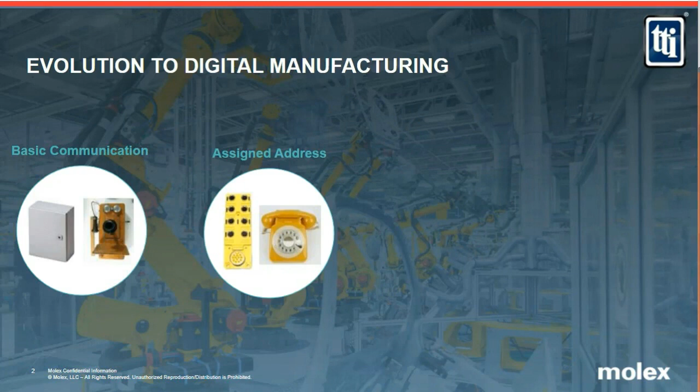We start to see the real transition to digital manufacturing and that evolution as we start to think about how the cellular telephone started to change our lives.

The cellular telephone started to change our lives when it became the standard outside of being mounted in a car, and it was available on the hip of your pocket, and you were carrying it around. But what that was, was just networking that mobile device, that ability to communicate to different individuals anywhere without having any wired connection to it, having that device sitting on a network.

So we can think about the parallels of a network and that transition that happened on the plant floor, like a distribution block, a smart block that supported industrial protocol. Those first industrial protocols were DeviceNet or Profibus or the like, in which we started to consolidate not only the wiring closer to the devices at hand, but we started to consolidate the communication of those messages coming from those devices back to the main cabinet via networks.

But again, what we have to take into consideration is that your cellular telephone at that time was nothing more than a telephone. It had a very single use. Within the implementation that exists today, the majority of I/O blocks are very much single use, which means they are a piece of hardware developed specifically for a task at hand.

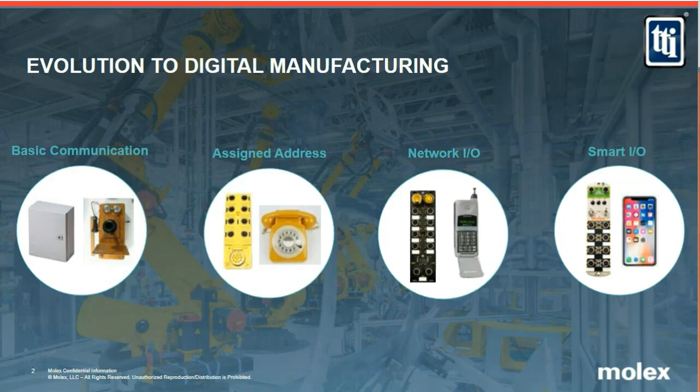All right, moving to today's architectures and really understanding what they are and understanding how they're limited in terms of where we sit within the transitions that we're seeing on the marketplace.

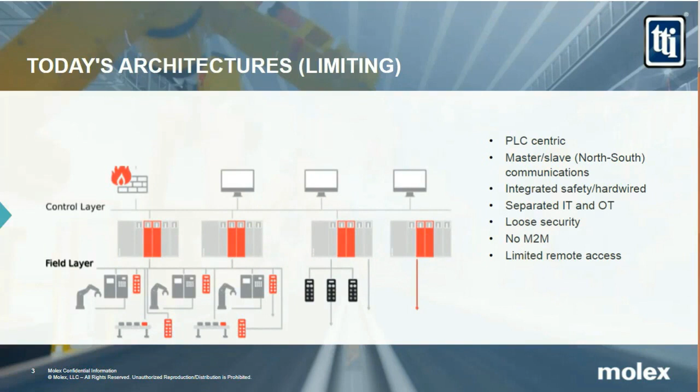Architectures that exist today are very consistent with the way they've been deployed since we went from relay logic to PLC-based centric systems. So that being said, the majority of architectures today on the plant floor, within a conveyor application or within any industrial plant-based application, is very PLC-centric. They're very master-slave, north-south communication, which means that communication as it relates from the transition from the enterprise layer through to the control layer where the PLCs sit, and the field layer, is very much directional.

You can gather information or push information from the field layer up through the control layer into the enterprise layer, or enterprise can request information via the control layer, the PLC level, or the device level, but it's very push-pull. It's not open communication as it relates to real time, or real communication related to any decision that's other than one that's been put into the system.

So it's limiting. All of the safety versus non-safe communication at the control layer is segregated. There are two separate networks. There's a safety PLC and a non-safe PLC, and a large majority of those are separate networks that exist on the plant floor. There's very loose security.

And what I mean by security is that there's an inability to securely access complex devices like robots, for example, or complex CNC machines or complex vision systems, to pull data or to do firmware updates or bug fixes on the product via a web-based connection. And that's because of this very loose security and the fear of allowing access to a field level device, and allowing that access to perhaps then migrate and make its way back into the enterprise layer where companies can be hacked.

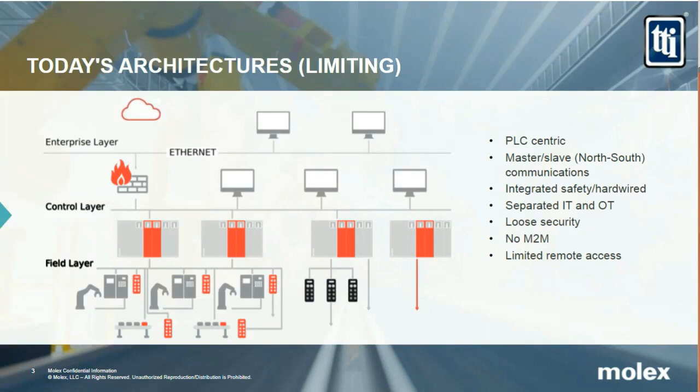And what does that mean moving forward? How do these limitations that exist, that have come about because of the way the transitions have occurred in the market, how do those have to change? I like to point to the analogy of the flip phone versus the smartphone, and flexibility is a big piece of it. A big chunk of that is also emerging business models.

Everything is a service, which means that the way in which complex machines will service their products at the field level moving forward might not be to implant an engineer within a facility based on that facility specifying a number of their complex machines, for example.

It may mean that there is a defined, safe connection in place, where then the support and the maintenance and all of the interaction between the manufacturer and supporter of that complex machine is done remotely. And that then, from a business model standpoint, changes everything about the way that company manages their equipment.

And therefore, that can build cost out of the application because they're not inserting an individual directly on site. And so that builds cost efficiencies, efficiencies as it relates to travel, as it relates to all those different pieces. So that's just an example of some of the things that we see changing moving forward.

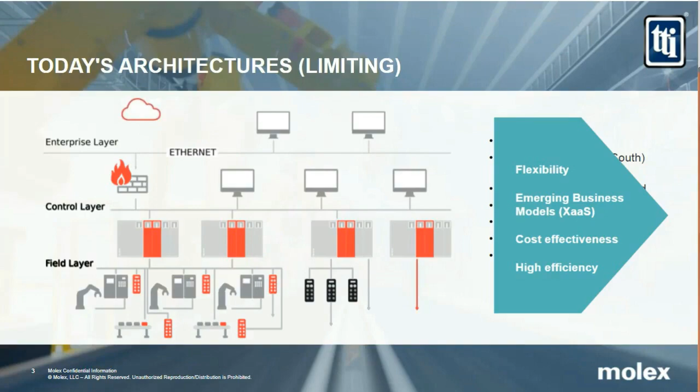So when we think about these limitations that exist today that we all know about, this drive to Industry 4.0 is very specific around an understanding of some of these limitations, and the fact that a number of these emerging technologies will allow us to build these efficiencies in. So what do tomorrow's possibilities bring within IIoT and Industry 4.0?

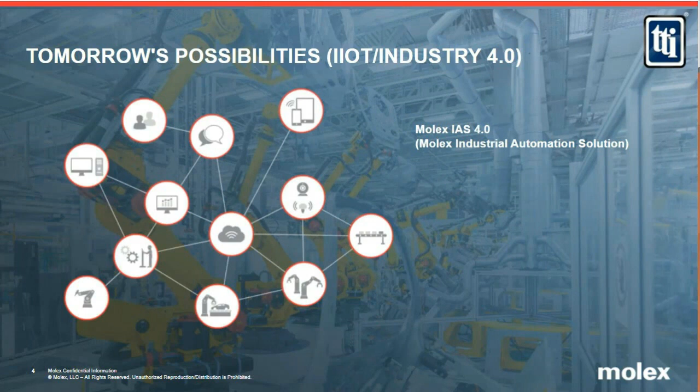These are defined within the program that we're working on, which is Molex Industrial Automation Solution 4.0. It really creates something that's much more open, where you have a much more distributed control strategy, where you no longer have just communication that's master-slave.

So, for example, flip phone to flip phone, or flip phone to home phone. You also have the ability to manage multiple connections between multiple devices at the same time. Each one of these devices has the ability to take on other responsibilities. So there's embedded support for safety and integrated security.

There's no real differentiation between IT and OT. It's one technology. IT is information technology, which is the IT we know in our day-to-day lives. OT is operational technology, and that's the management of the devices at the field layer, the sensors and the complex scanners and devices, and the ability to have all those devices, as we move forward, have more intelligence and be able to intercommunicate and make decisions that are best for the manufacturing process or best for the organization's long-term goals and strategies.

Each device having embedded security, so you know that when you speak to a device, or you make a connection to a device, or you make a connection to an area of ownership that you have, you know it's secure. And from a security standpoint, I like pointing to online banking.

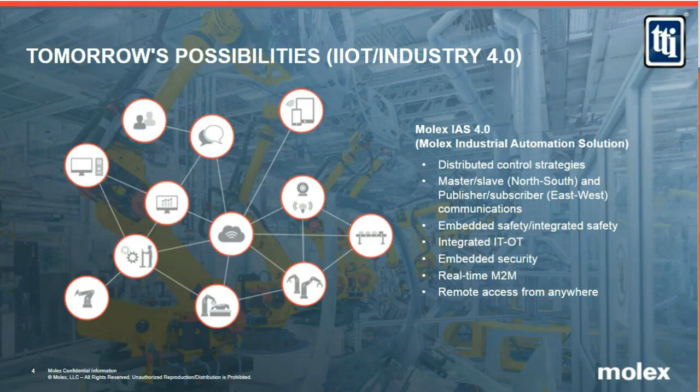Within our core IP, intellectual property, we support a large array of fieldbus communication protocols for safe and non-safe, for scanner and adapter, that are all TÜV certified. We are one of the leaders in the market and have been for a very long time as it relates to standard industrial protocols for EtherNet/IP, for Profibus, Profinet.

We've developed backplane modules that sit on the backplane of the majority of communication and PLC manufacturing collaborations across the globe in all flavors. That includes EtherNet/IP, Profinet, Profibus, CC-Link IE, DeviceNet, Remote I/O, EtherCAT, and for master-slave, scanner and adapter, safe and non-safe.

We design and manufacture our own industrial protocol stacks and hardware solutions. That's very important because as we move towards this next transition in the marketplace of digital manufacturing, the ownership of that IP and the ability to implement those pieces of technology, not only on the hardware platforms or on the solutions that we provide, but also as we work with collaborative companies that require pieces of it that can then sit on that more distributed control architecture that we just walked through, that have the ability to pop onto that architecture and then intercommunicate with multiple devices manufactured by multiple manufacturers supporting the same communication methods.

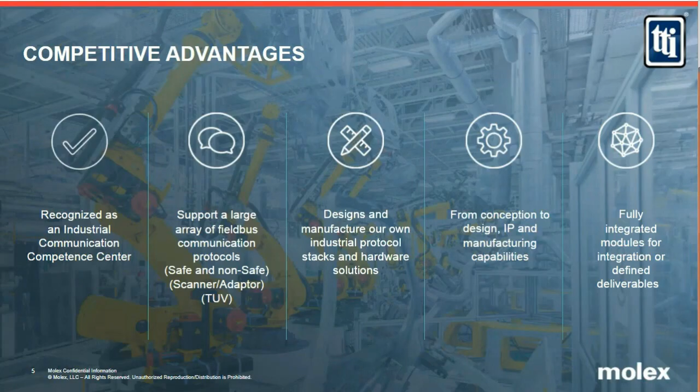So where really has been the role of us in factory automation? Going to my last point, we've always been enabling devices with protocol capabilities, as well as mechanical connections for power and device. So of all the different technologies that I mentioned, including some of the up-and-comers like IO-Link, we support the technology not only at a technology level, but we also support it at a product level, and then with our collaborators, we provide it within solutions that are offered even from a sensor perspective.

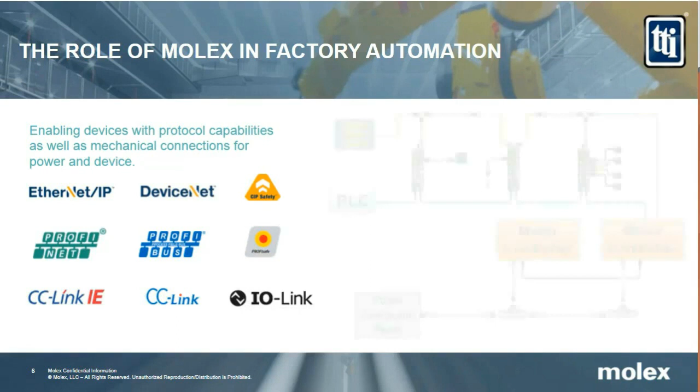So it's really about, on the plant floor, having the role of making connection from a communication standpoint. And that connection rolls from where the asset, the device, is connected, from the PLC to the distributed I/O, and from the I/O via that media to the sensor, and then also the support of the actual protocol and communication that is required in order to make that communication possible from a packet level. So the communication packet itself.

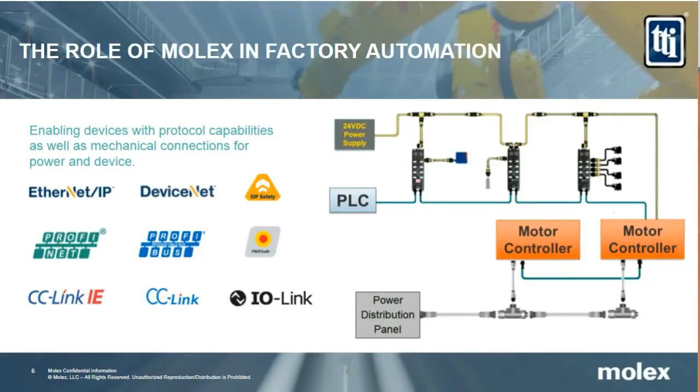The evolution of digital manufacturing. So moving forward, we understand that to some degree there's going to be no difference between a safe and a non-safe device at some point in the marketplace. So moving forward, hardware must be developed and support TÜV certification. Connectivity has to be there from both a physical media standpoint, what I mean is the cable, and from a communication standpoint that supports the rules and all of the standards that exist within the protocol, regardless of what that is, whether it's, for example, EtherNet/IP or Profinet, or CIP Safety or PROFIsafe.

Each device, moving forward, we feel, will start to have logic embedded in it. So we'll have some decision-making capabilities. We think that in the short term, that logic will be limited to some degree, and there'll start to be islands of automation where you can distribute some logic and then tie, basically, just a connection to perhaps in the short term a supervisory PLC, but then offload perhaps some safety logic within your systems infrastructure and within your architecture.

IIoT is a big piece. So when we talk about IIoT, we really talk about the connection of the product via the cloud or via an on-prem server, and having the ability to have all devices connected securely, like that smartphone that we talk about as an analogy.

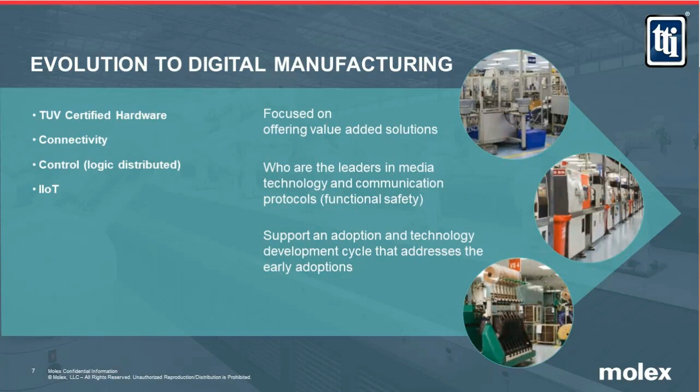Supporting within the program, supporting pre-certified or custom developed apps. What does that mean? Again, I'm going to point to the smartphone and the way in which you use it. We all know, and we've all used the application store where we've gone and downloaded a very specific application that allows us to have perhaps a much more completely defined performance-oriented GPS, or turn our phone into a level because we're hanging some pictures in the living room.

Think of it in those terms where all of the hardware, like your smartphone, has the capability of managing all these different pieces that you have access to via the app. So imagine you have a hardware platform that is functional safety rated. It's secure hardware platforms that can be delivered in different form factors. So you can think of it as an I/O block where it's distributed from an IP67 standpoint, or you can think of it, for example, as a PCBA that supports PCIe as an electrical interface and is put into a PC-based controller for a complex machine.

But what that hardware needs to be able to support is all of those connectivities. That hardware must support major industrial network technologies for standard and safety communications, as well as machine-to-machine and wireless communication moving forward. That hardware needs to support development and execution of standard or safety control applications and be able to act as the brain of the machine. It has to be able to support IoT. It has to be able to support some cloud connection for connectivity.

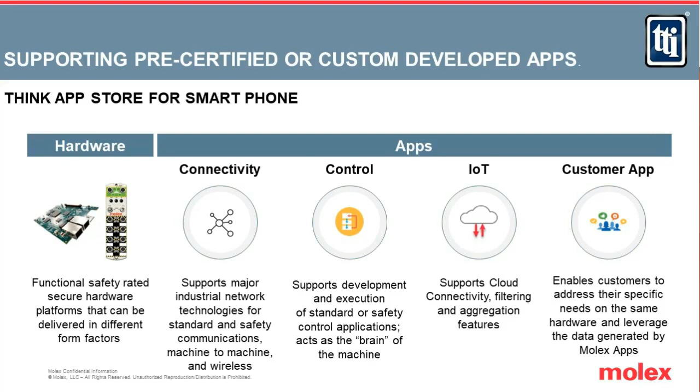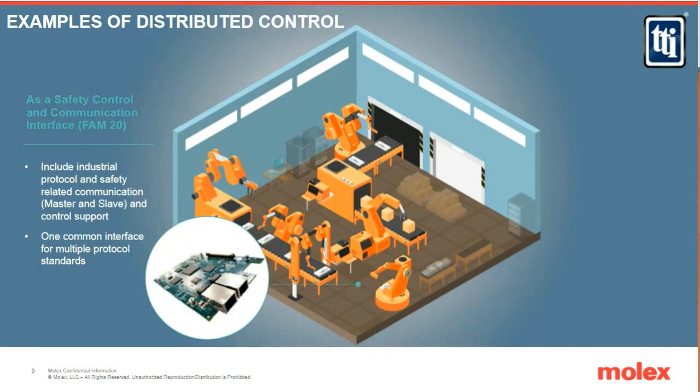Applications of distributed control are very simple. In an application where you might have a small cell that might look like this, you may include a device like a network interface card. But that network interface card sits in a PC-based control platform for a complex machine like a robot or a CNC machine. There's multiple different examples. Any PC-based control, any complex machine that has its own control platform.

You can then include industrial protocols, so allow it to be a master and slave on whatever protocol you need based on where you're selling the product from a logistical standpoint, because some languages are different in different areas of the world. You may include the ability to support some control. So you want to do some I/O support and maybe have some logic running on there. So really having one common interface for multiple protocols and standards can be implemented through a small exchange of requirement specifications.

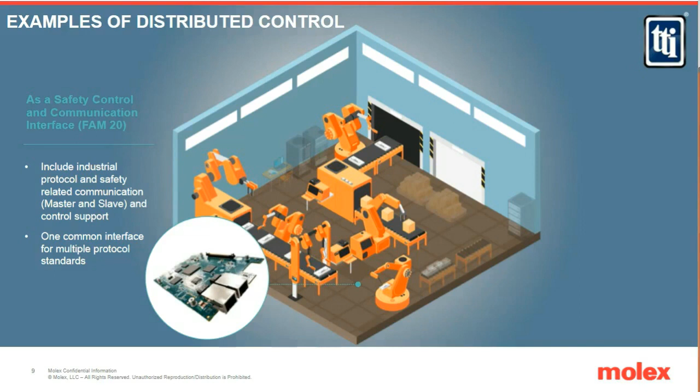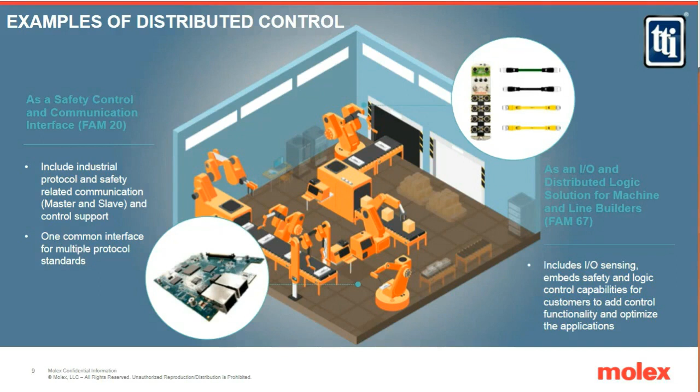Or an application more like a conveyor application or a line builder application, you can actually package it in the form of an I/O block that supports I/O and distributed logic, includes I/O sensing, embedded safety, and logic and control capabilities for customers to add control functionality and optimize the application. So it really is a transition that, we feel, is going to happen over a period of time, and those timelines are being defined as we talk today.

And because the devices are only applied based on the way they're configured, you're only paying for or using the pieces of technology that are specific to your areas of ownership or your areas of need from an application or architecture standpoint. All of those common aspects that we walked through are associated: the ability to make a cloud connection, the integrated security, and the ability to allow, as I mentioned when I lost my telephone, onboarding of the device or the maintenance of a digital twin of that particular device being maintained on a cloud someplace.

So if someday the product fails or you need to just monitor the system offline, that can all be handled securely, remotely. So it's really about transitioning control to the point where it's less rigid and a lot more open. That's really the key that we're seeing in general from a trend standpoint within Industry 4.0, and that we're trying to deploy in the development of our IAS 4.0 program.

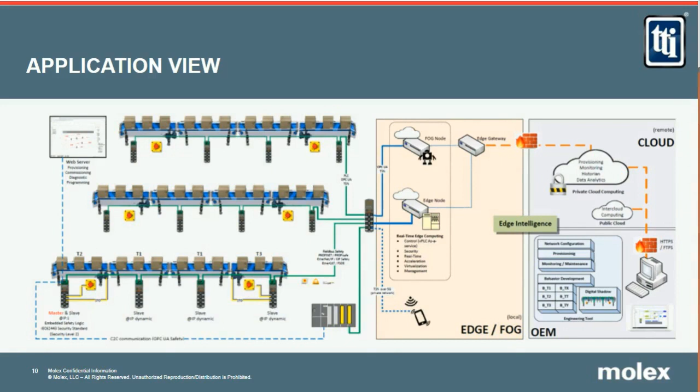Digital manufacturing will depend on multiple industrial networking technologies, delivering real-time information, intelligent sensors, and being on the edge of operations to enterprise and beyond. So that we encapsulated through this entire piece, but that means working with partners from an asset standpoint, from a sensor standpoint, that enable themselves with some of the key technologies, for example, being able to support safety, having a secure connection built in, and being able to sit on a very open network, to support multiple protocols just by clicking off the protocol you want to use versus having to buy a separate hardware platform.

These are all part of those transitions that we're seeing in digital manufacturing, and these are all part of the interactions that we're having through consortiums, through different working groups, and to some degree even working with competitive suppliers of solutions, in order to create a world where everything can talk to everything else, and that's going to take some real consolidation of agreement on technology and deployment of those technologies and specifications around those technologies.

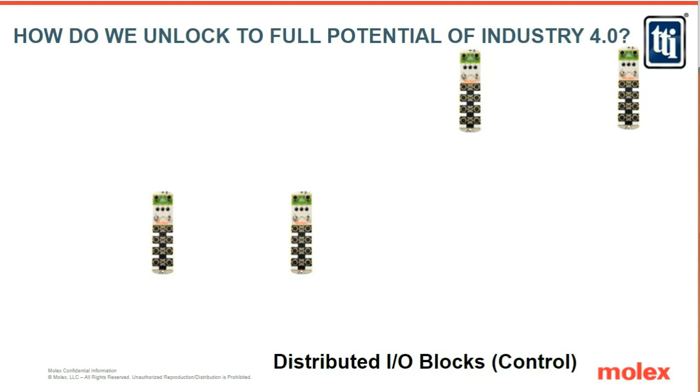the consolidation of communication. So today we speak multiple languages. We have to support multiple languages from a protocol standpoint, depending on where products are being deployed and where a specific technology might have its roots. Moving forward, like the business world, if you attend a meeting in Germany or in Japan, and there's people representing multiple countries, it's becoming more and more common today that those meetings are held in English, because we have to have a standard foundation in order to understand each other.

And we see it the same way: yes, there will be support for multiple protocols for some time to come, but the transition really has to move to some point to support different areas. So OPC UA is very important. MQTT is very important. And TSN, time-sensitive networks, are very important.

So, from a knowledge share standpoint, or from trying to provoke discussion, we really see the need to be to some degree protocol agnostic or to be language agnostic from a control standpoint. And we need to get to the point where, regardless of what sensor you buy or what piece of automation equipment you buy, the ability for those devices to intercommunicate is either defined, or there's an ability for the manufacturer or provider of that product to enable that capability. And that's when the market really opens up, and that's where we start to see those efficiencies from a cost and a deployment standpoint really start to take effect.

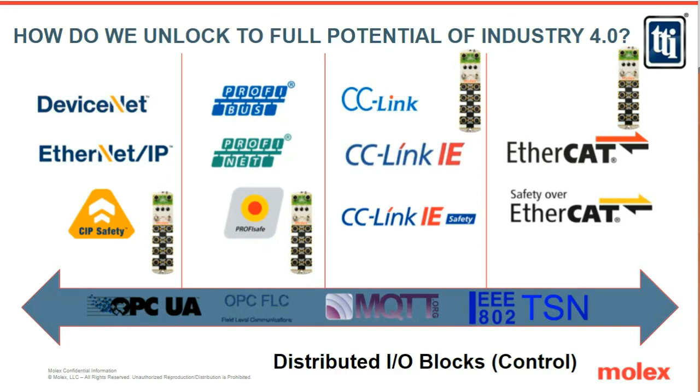The role of connectivity. So the role of connectivity, where we sit today and the role that we play, working with our collaboration partner, TTI: what are the areas in which Molex and TTI can help you today moving forward? From a connectivity standpoint, plug-and-play technology, IP67 or higher design within our I/O blocks. These are all governed by international and local electrical and safety standards, and the support for all common industrial wiring requirements: I/O signal, control, communication, and motor power.

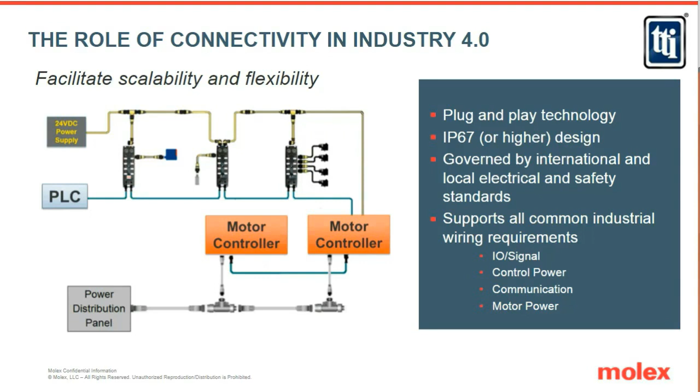Control power. Brad power, the ability to make quick connection via our 7/8 Mini-Change, heavy-duty multi-pin connectors, M12 and M23, are all products and solutions that are inventoried and available, in many different form factors and many different lengths or custom lengths that you can use within your control power applications.

Signal. A complete line of M12, heavy-duty connectors, M8, and DIN connectors, regardless if you're talking about your hydraulic and pneumatic valves or your proximity sensors or photoelectrics. The ability to make connection physically to those devices at the device level, those solutions are a big part of our portfolio, as well as network communication.

The ability to make connection to devices regardless of what network they support, whether that be Profibus or EtherNet/IP or DeviceNet or serial for that matter. A complete line of M12 D-coded and Cat5e solutions, heavy-duty connectors, M12 X-coded, as well as RJ45 for connection in-cabinet or connection to that enterprise layer.

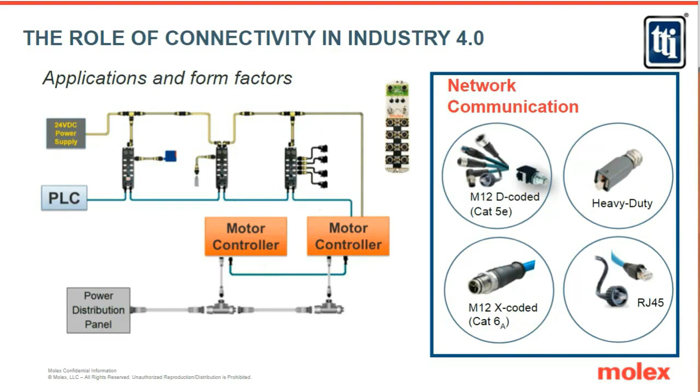Motor power, the connection to bring Brad power, M35 connections or heavy-duty connections, or M40 connections to those motors that you actually have sitting down along your conveyor. We have quick connect solutions in multiple different areas that in many ways have been leaders in the area of technology for many, many years.

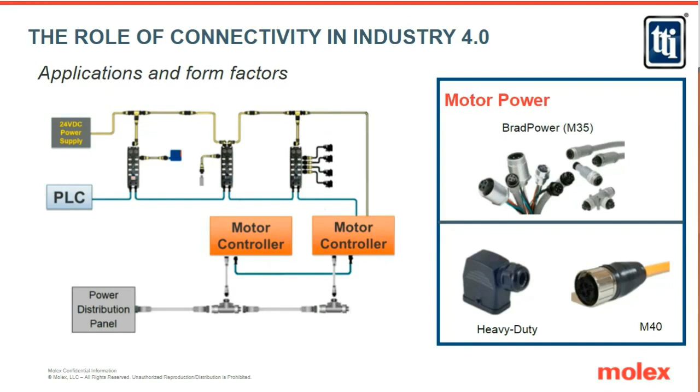As well as a line of products offered in collaboration with Contrinex for inductive and proximity sensors that support IP67, that are vibration and shock resistant, and also support IO-Link as a technology moving forward, which we feel is a big part of that transition.

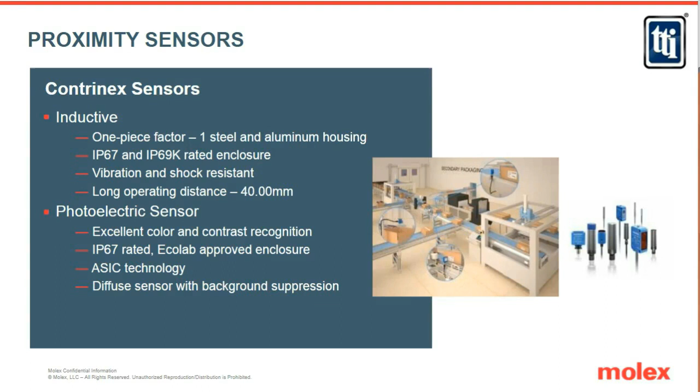In collaboration with TTI, Molex provides that real common thread that allows the interconnectivity from the edge devices, so from sensors to the enterprise via copper, fiber, and wireless mediums. So bringing these world-class brands together under this collaborative roof, TTI and Molex, we really feel that we bring a very strong position as it relates to that interconnected world that exists at the field, device, and enterprise layer.